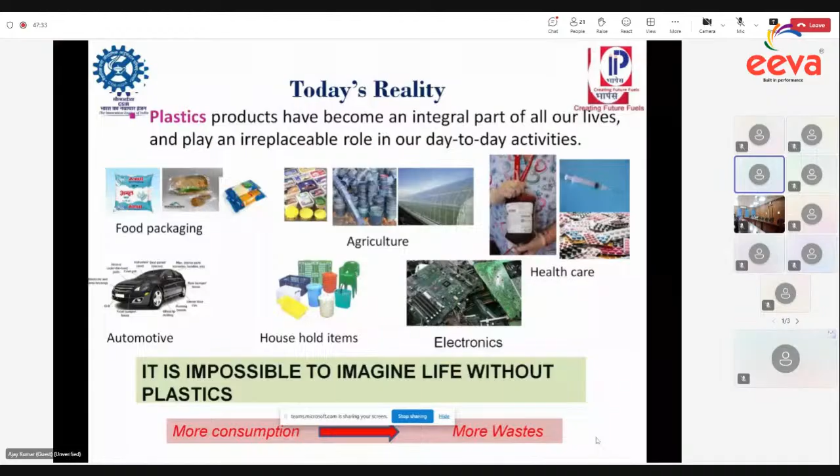So if we have more generation, and as you know plastic is non-biodegradable, we have to find a solution for how to dispose it, because it creates problems for our society, health, human beings, animals, everything for the environment. So we have conventional waste management like landfilling, incineration, mechanical recycling. As you very well know, I am not going to detail all these things.

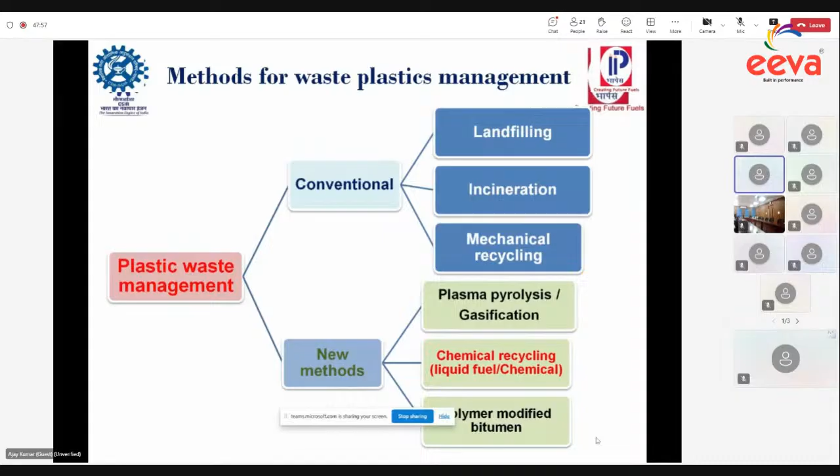Here, what IIP offers is chemical recycling. So what is chemical recycling? As you know, the origin of plastic production is crude oil. So we want to recycle from plastic back to crude oil. It is the permanent solution. If you see conventional methods like incineration and mechanical recycling, these will not give a permanent solution.

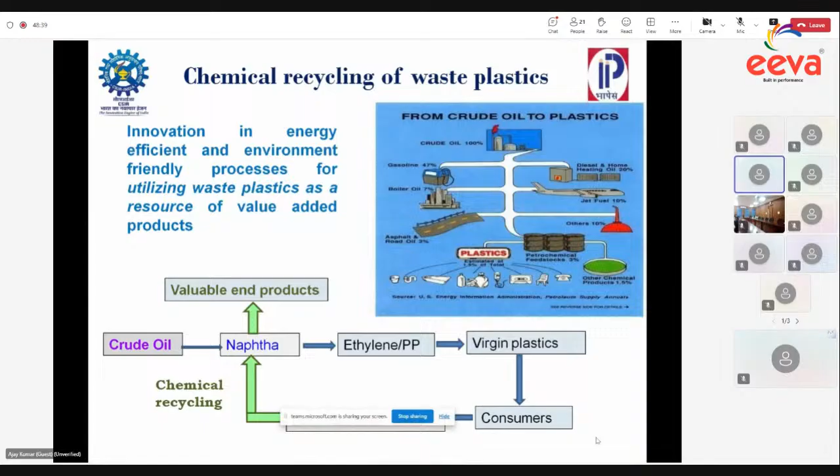So here our emphasis is to convert the plastic into crude, like pyro oil, and then convert it into useful products like petrol or diesel. So what types of products does IIP offer from chemical recycling of waste plastic? Petrol, diesel, greases, wax, and chemicals.

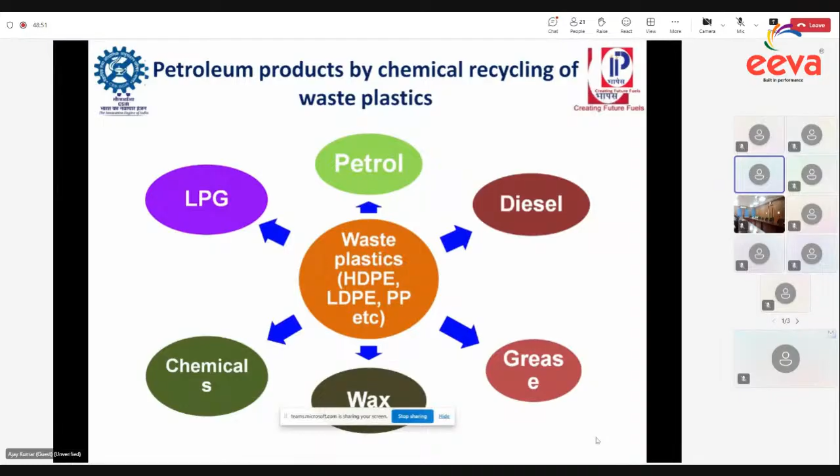So what is the CSIR-IIP-GAIL technology? What types of feed are required for this process? All polyethylene and polypropylene, PE and PP, are useful for this process. We are avoiding PET bottles and PVC, because polyethylene and polypropylene make up almost 60 to 70% of the total MSW plastic. So here we are targeting only polyethylene and polypropylene.

As you know, this MSW plastic contains foreign materials like organic contaminants. So we have to pre-treat this plastic so it can be useful for our process. There are a number of steps for pre-treatment.

Firstly, we do dust blowing, then shredding of the plastic into smaller pieces, then water washing, then drying, and then agglomeration. These are the steps for pre-treatment of our waste plastic, and this feed is useful for our process.

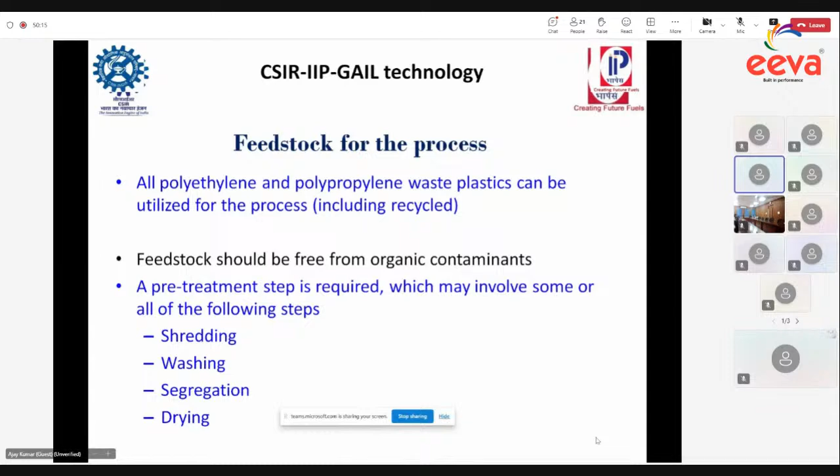So what is the CSIR-IIP-GAIL technology? In this technology, if you take 1 kg of plastic, you will get either gasoline or diesel or aromatics along with LPG.

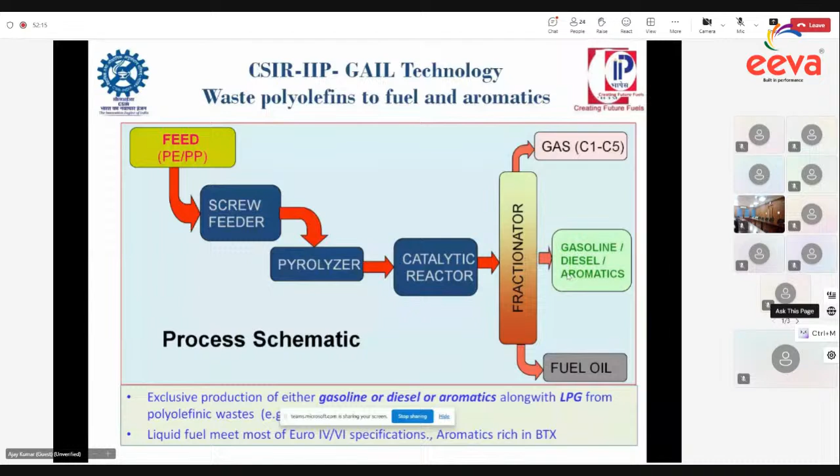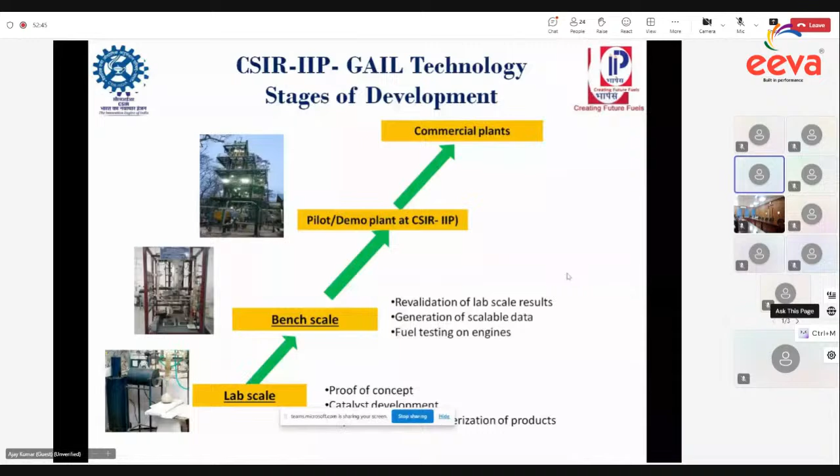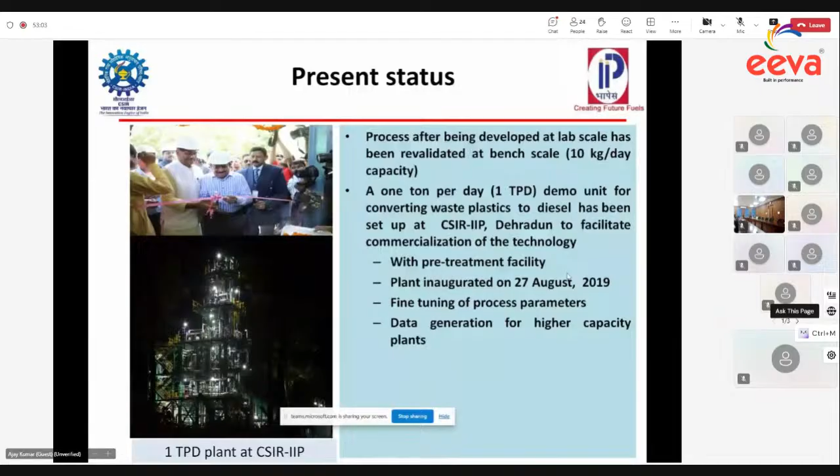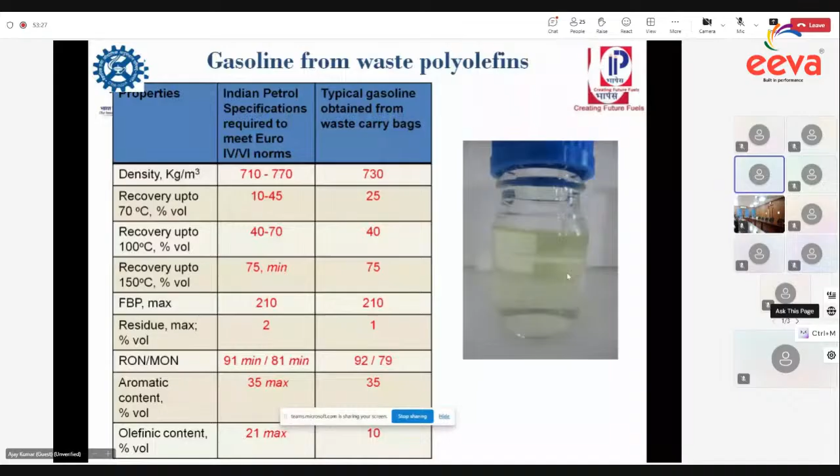So these are some properties. As you know, for diesel or petrol, we have to meet the BS4 or BS6 standard norms in terms of density, viscosity, final boiling point, aromatic content, all these things. In our process, these properties are meeting the standard for diesel from waste plastics.

We also did some emission performance testing of these waste plastic fuels. We have the laboratory in IIP, so we checked emissions like particulates, carbon dioxide, all these things. It is matching with the conventional diesel obtained from the petrol pump.

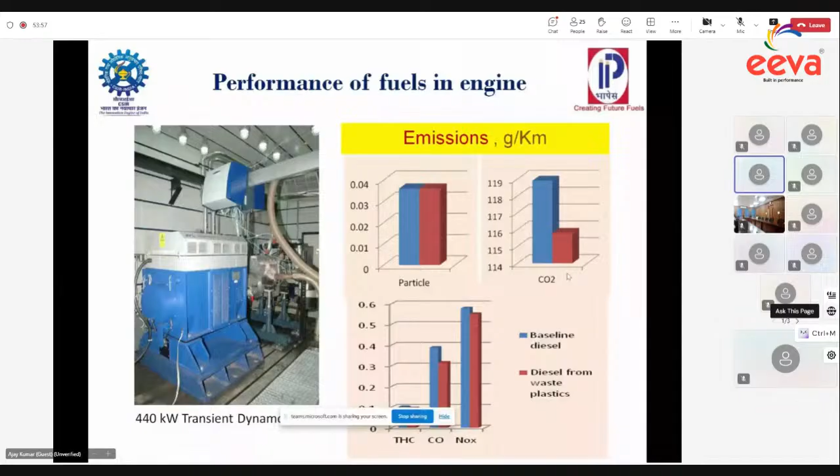This is just the efficiency of the fuel in terms of kilometers per liter. It is at par with the conventional diesel obtained from the petrol pump.

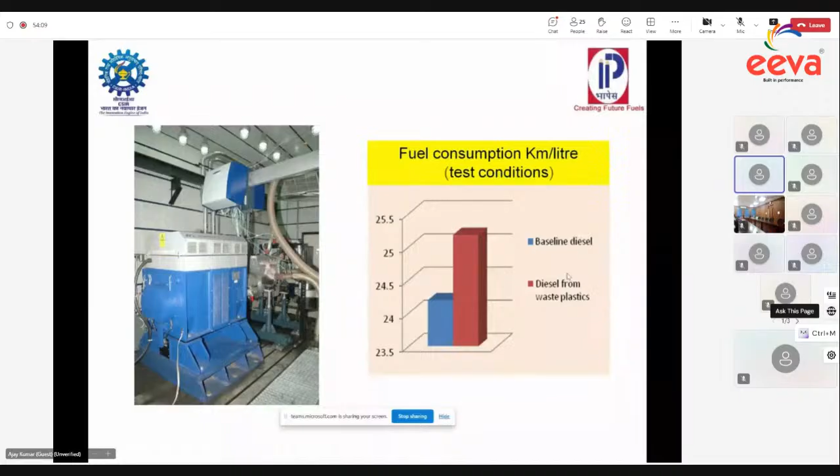Also, we have developed the technology from the waste plastic to wax and greases. In terms of economics, we cannot increase the price of diesel or petrol due to social cause reasons. So we have also developed a process to produce petroleum waxes or greases which are costlier than diesel or petrol, so the economics are better compared to petrol or diesel. We have also developed this technology.

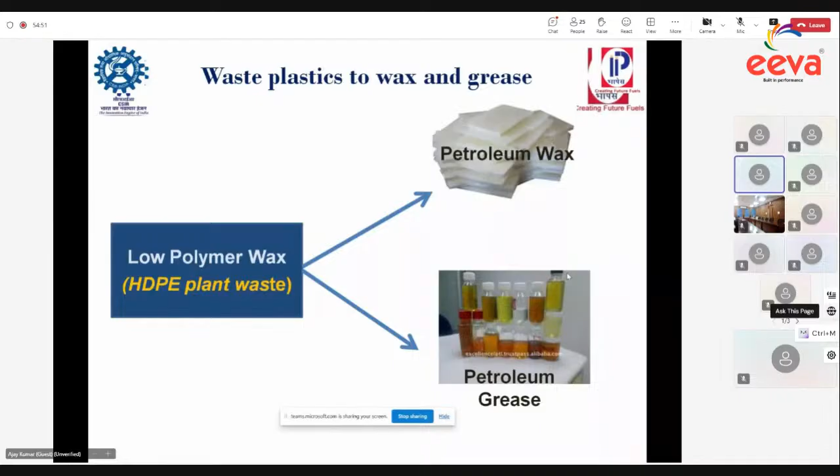In terms of utility requirement, manpower requirement, and land requirement, we need a pretreatment unit as well as a process unit. Land for the pretreatment unit requirement is 2 acres. For a conversion unit, diesel conversion is 1 acre. We also need electrical power, water, and LPG for the starting fuels.

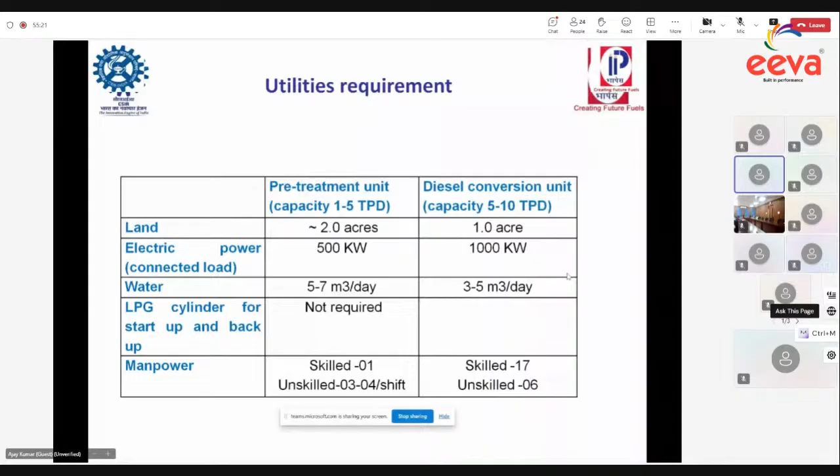So to conclude, this is the process to produce diesel and petrol and solve the waste plastic disposal problem in an environment friendly manner.

CSIR-IIP also developed a process for waxes and greases from waste plastic. These plants can follow a hub and spoke model, meaning the pretreatment unit is at the site where plastics are concentrated, such as the municipality, and the process unit is located away from that. This process is economical even if we set up the plant for lower capacity, like 1 TPD or 2 TPD.

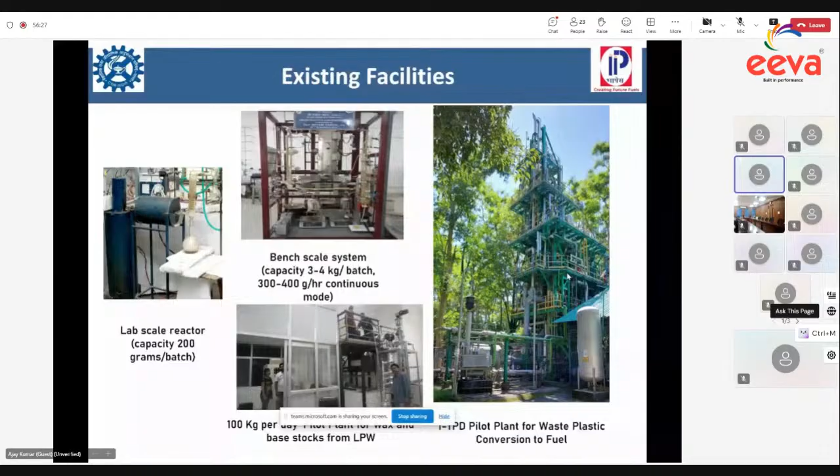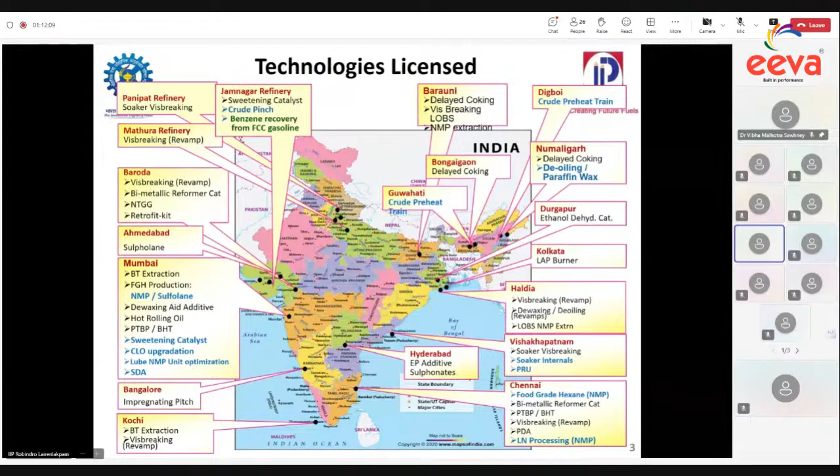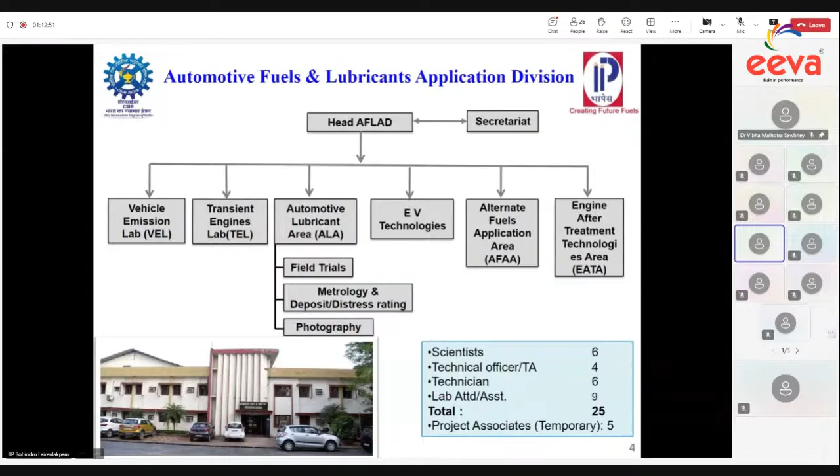So moving on, we have different divisions, and the division I belong to is called Automotive Fuels and Lubricant Application Division, and we deal with the applied area where different fuels are tested for their performance and compatibility with materials and so on. You might have heard of E20, E10, plus the upcoming flex fuel. So there your petroleum product is not 100%, it has been mixed with alternative fuel so that we reduce the petroleum product.

And the introduction about our technology: there are thousands of diesel autos of L5 category already on road, and they are polluting with noise as well as air pollution in the cities, capital cities, tier 2 and tier 3 cities, leading to associated health issues because diesel autos emit high amounts of PM10 and PM2.5. Those emissions are very much harmful to human health.

So we have devised one device which is still under evaluation stage, and with such indigenous device we can convert existing diesel autos into electric autos, which will mitigate the unhealthy level of air and noise pollution in state capitals as well as tier 2 and tier 3 cities. Apart from that, this product will be an import substitution, and it aligns with India's energy independence goal of Viksit Bharat as well as Atmanirbhar. It will contribute to our target of 30% electric vehicles on road by 2030. At the same time, this kit can be used for any new electric autos designed and developed by different entities. So this kit will be common for two purposes: one for new three-wheelers, and one for the electrification of existing diesel autos into electric vehicles.

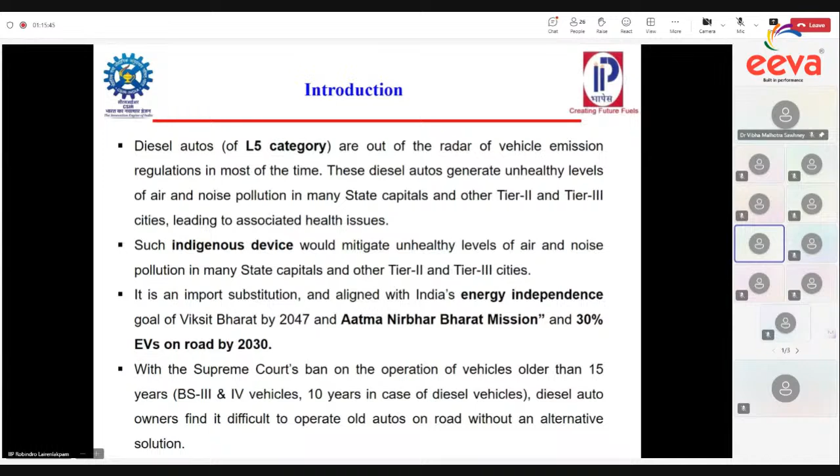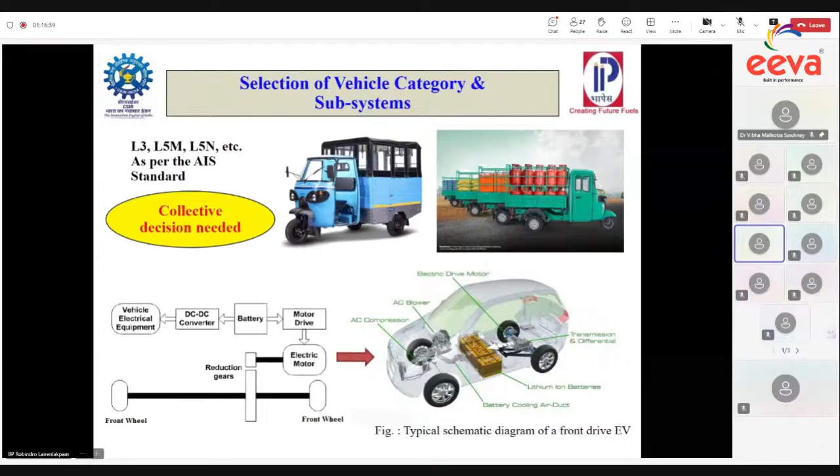Moving on, we need a thorough study for the EV motor selection, depending on the vehicle category, whether it is cargo or passenger, because the weight and other vehicle dynamics will be different. So the selection of EV motor is very important from the perspective of sustainability and efficiency.

From the sustainability perspective, permanent magnet motors are not sustainable because of the use of rare earth material, which is not much available in India. So at the end of the day, we may be importing the rare earth material, the magnets, from other countries, and then we'll end up with another problem. That's why in our study, we are using non-rare earth electric motors, so that it creates a sustainable ecosystem for electric mobility.

While selecting and designing the electric motor, we need to consider certain factors like frequent start-stop, high rate of acceleration and deceleration depending on different drivers' behavior, then high torque at low speed, for example hill climbing or flyover climbing, which we call road gradient in technical terms, and also low torque cruising.

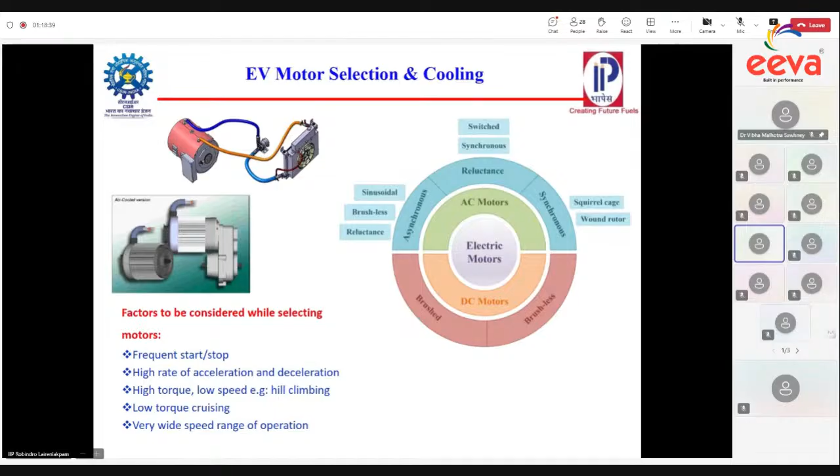Moving on, the selection and sizing of battery is very important, depending on how much electric mileage we are targeting to achieve, for example 100 kilometers, 150, or 80 kilometers, and so on. We are using lithium-ion battery because of its high energy density, smaller size, and many other advantages.

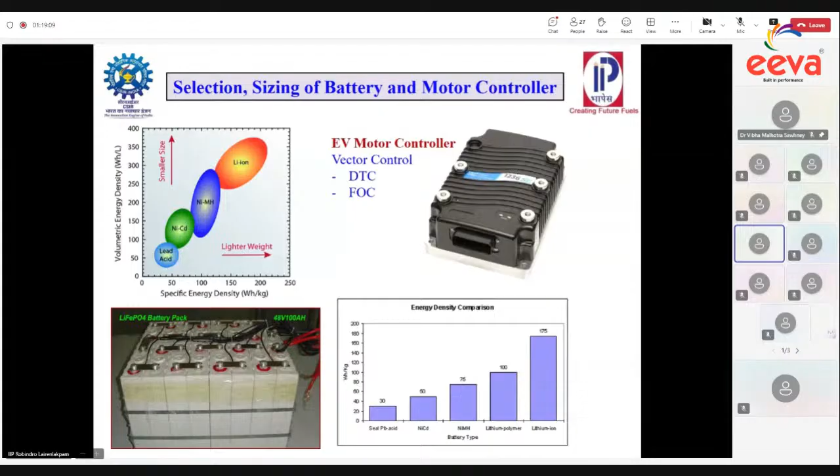Moving on, while doing such engineering work, we need to also consider the different drivetrain topology, how the motor, gearbox, and differential can be arranged and connected. There are different ways of connecting and arranging these products and subsystems inside the vehicle. So these are the different topologies that I will be discussing briefly.

The first topology, EM stands for electric motor. The electric motor is directly connected to the clutch, gearbox, then differential. This is a typical drivetrain topology of an IC engine vehicle, where the IC engine is removed and the electric motor is fitted in its place. It's a very simple one.

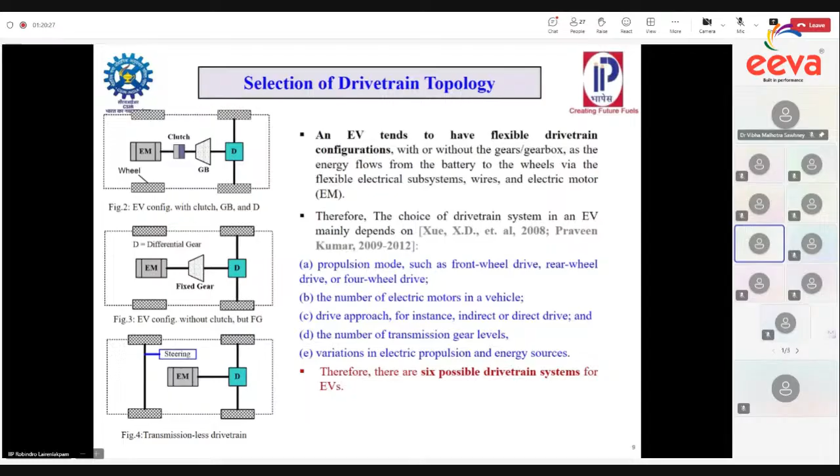The second one has the electric motor directly connected to a fixed gear. This is what we have done in one of our proof of concept studies. The third one has the electric motor directly connected to the differential. This topology is adopted by electric rickshaws, e-rickshaws; if you look at an electric rickshaw, you will find the electric motor connected directly to the differential.

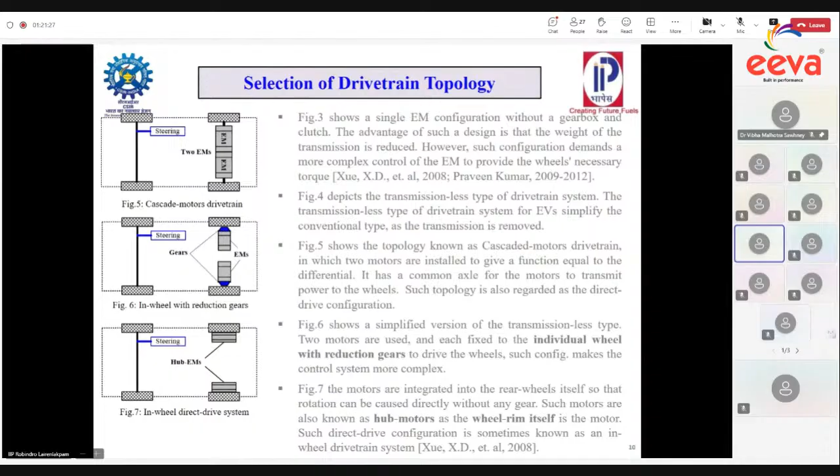The wheel rim itself is the motor, like you have in electric two-wheelers and scooters. So these are the different topologies based on our requirement and the techno-economical analysis. We need to select the appropriate topology for our new kit as well as for our new electric vehicle.

Once you get the torque at the differential, it is divided into two equal torques on each wheel. Then, once you have the torque on the right and left wheel, it will be used for calculation of the force on the wheel. This force is what you require to select and size your electric motor, because this force is used for the propulsion of the vehicle, to move it forward and to carry the load. That is how we calculate the forward force for the vehicle and the force acting on its wheel.

Moving on, this is research we did a couple of years ago just to check the feasibility of converting an existing IC engine vehicle to an electric vehicle. This was done as per the gazetted notification G.S.R. 167(E), and this legislation allows conversion of any existing IC engine vehicle into an electric vehicle, subject to the approval and certification of the kit.

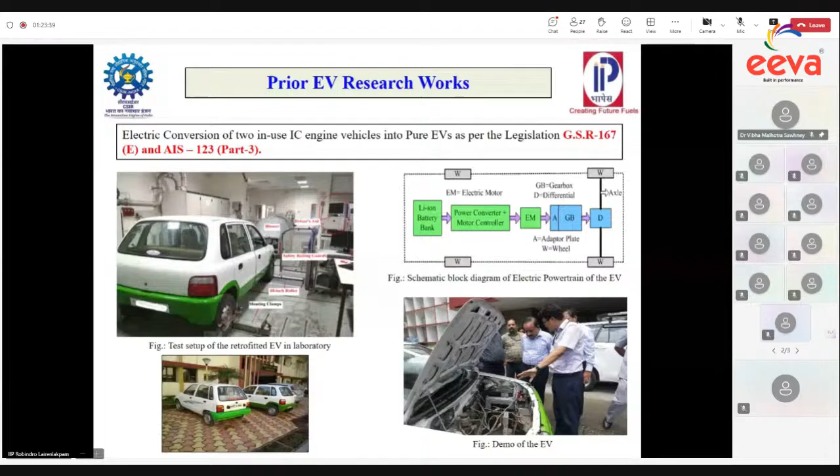This conversion process is done as per the automotive industry standard 123 part 3. This is what we have done in our lab, and we found that this is very much doable, with a lot of advantages from the techno-economical perspective.

As part of that prior research work, we performed these experiments in the laboratory and on road. Once converted, the vehicle is subjected to road load simulation on a chassis dynamometer and driven with Indian driving cycles common across the automotive industry, like IDC and MIDC, the modified Indian driving cycle. We also used different equipment to check vehicle dynamics, safety, and stability.

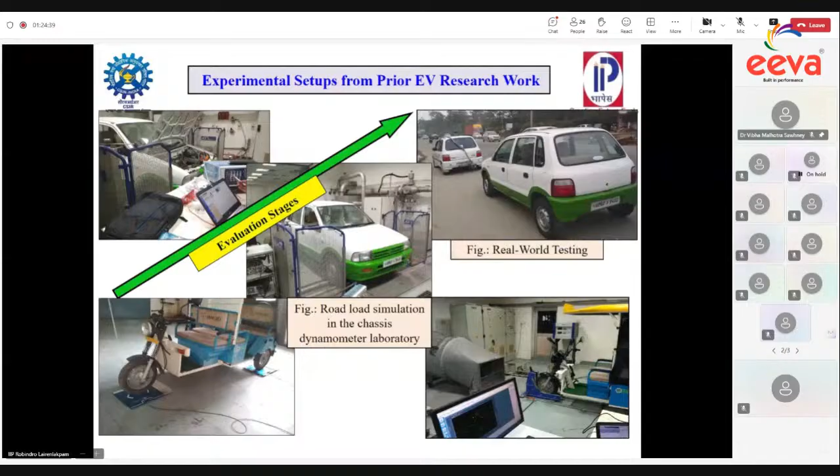For example, once you remove the IC engine and related parts, the original vehicle dynamics is disturbed. We need to bring the center of gravity back to the original position, measure the new center of gravity, and determine new parameters for the retrofitted as well as the new vehicle, like tractive force, vehicle reference weight, new center of gravity, and so on.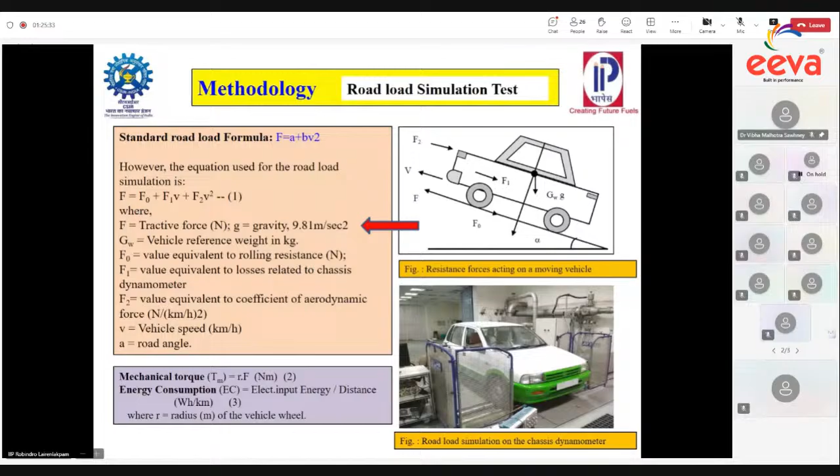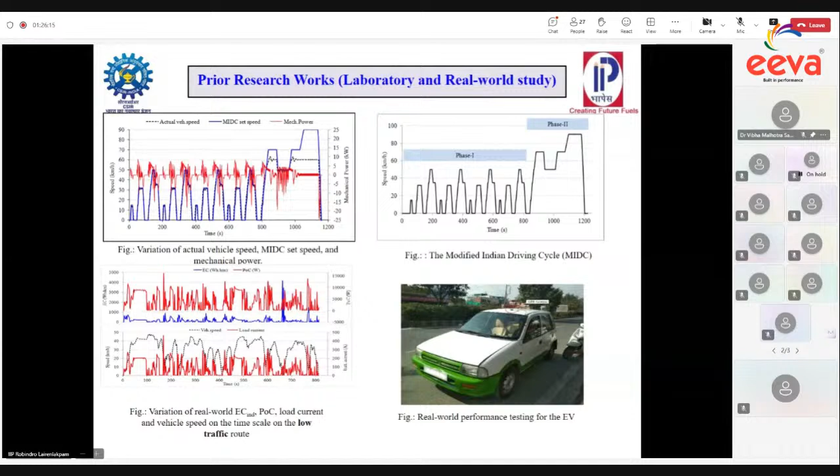Moving on, we used the modified Indian driving cycle during the laboratory test. During the entire cycle, we collected and recorded electrical parameters like current and voltage of the electric vehicle. Then we analyzed areas of improvement, energy consumption, maximum current flow, and so on. Likewise, the same vehicle is put through a real world test on actual road. We see the energy consumption and other electrical parameters, compare the laboratory data with real world data, find the gap, and improvements can be made.

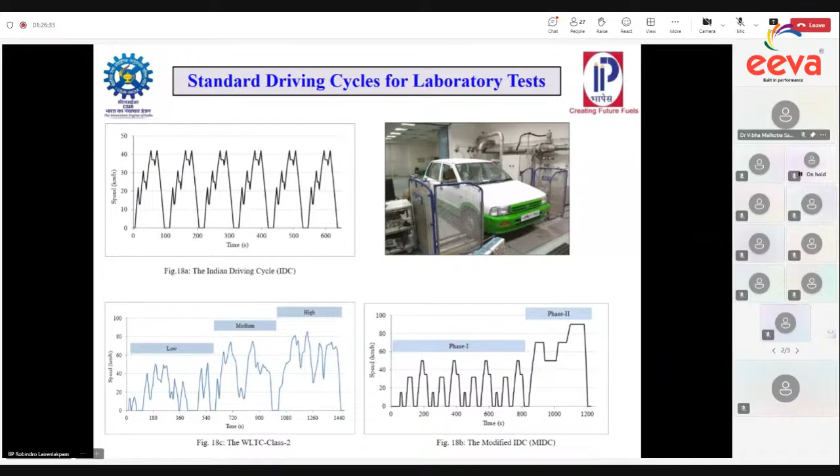These are the standard driving cycles that we use in our laboratory, used across all the automotive industries in the country. WLTC is the new cycle, used worldwide, and India is now going to adopt this new driving cycle. This is a very important part - once we have the new vehicle or retrofitted vehicle, it has to go through regulatory compliance tests and all the methods defined under the automotive industry standard. It has to go through that, and it has to pass.

Only the testing agencies will give the certification for launching and commercialization purposes. This is done under the CMVR homologation requirement, the Central Motor Vehicle Rules homologation. There are many legislations and procedures that need to be followed for new vehicles as well as retrofitted ones. For retrofitted vehicles, we need to go through AIS 123 Part 3.

It defines what to do and the procedures to be followed. Our target is to have a landing price of around 1.5 lakhs per kit. This target is driven by the battery, since battery is not mass produced in India right now. Mostly it is imported, though certain companies are manufacturing in India with Indian technologies. Once the battery cost is reduced significantly, the cost of the kit will also get reduced.

At the same time, during retrofitting, the technicians and fitters need to be trained on how to fit, repair, and maintain these systems. Such training can be conducted at regional MSME centers through MOUs and tie-ups, utilizing their existing infrastructure for subsystem fabrication and other work. We can collaborate with MSME for human resource training and imparting subsystem-level training for handling, repairing, fitting, and related tasks.

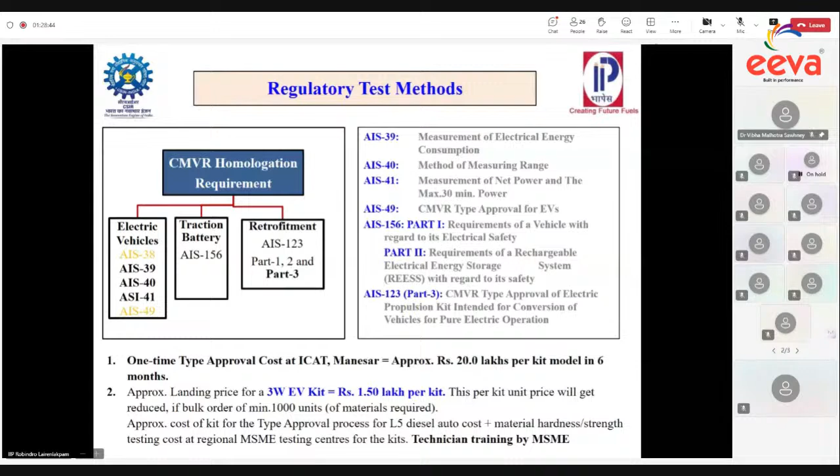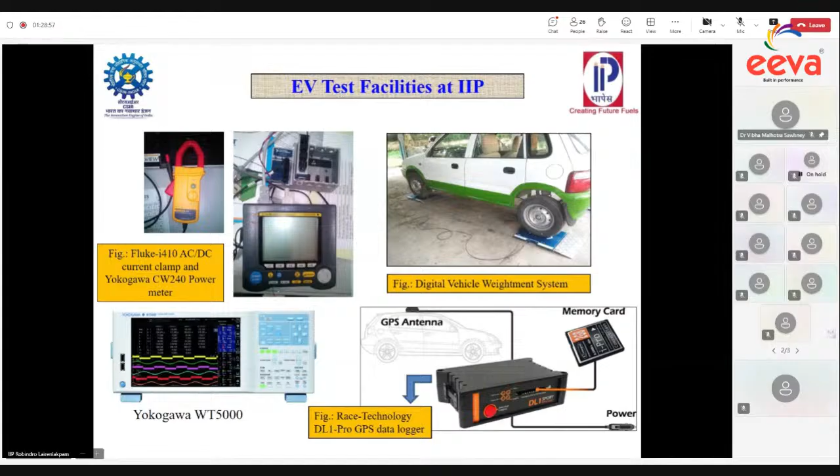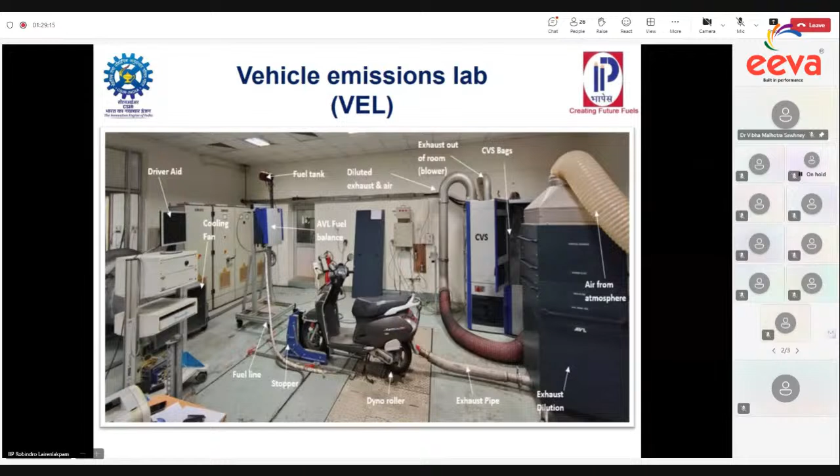We have many test facilities for new vehicles as well as retrofitted ones. These test equipments are required to generate scientific data for analysis and improvement. This is our vehicle testing laboratory, where the vehicle is mounted on a computer-controlled roller called the chassis dynamometer. The vehicle is tested in the laboratory, where road conditions are simulated inside.

Our division also conducts training courses every year. Even now, some transport officials are on our campus. We are imparting training to them, sharing the latest policies and updates from the ministry, as well as the latest technology. This is one area where we can collaborate with MSME centers for training technicians and fitters.

With this, I conclude my presentation. Thank you very much for your kind attention and patience. If anybody has any question, the forum is open to you. Over to you, madam.

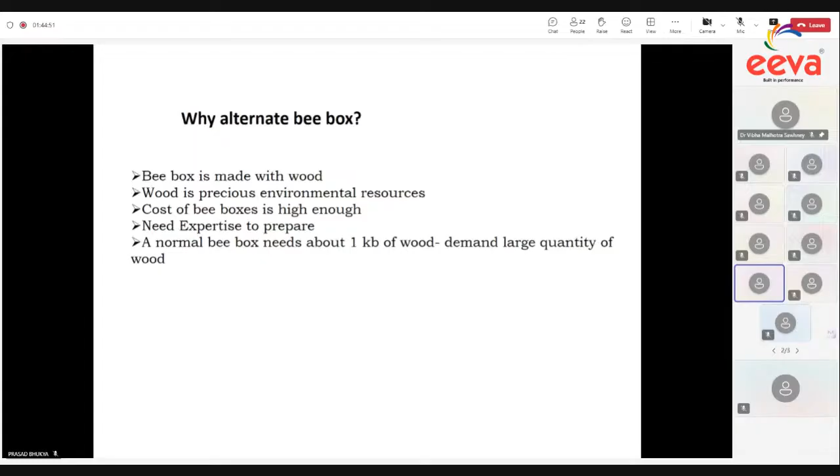If we see, then in that case we have to sacrifice a lot of trees for making honeybee boxes, because a normal bee box for Apis mellifera needs around 1 kg of wood, which demands a large quantity of wood, and is also very costly, because a wooden bee box in Assam costs around 2,200 to 2,300 rupees per box. It also needs some special expertise to prepare, because the general public cannot prepare it themselves. Although in India we know different measurements of honeybee boxes like A type, B type, it still needs skill to prepare these boxes. That's why we thought of some innovation regarding low cost honeybee boxes.

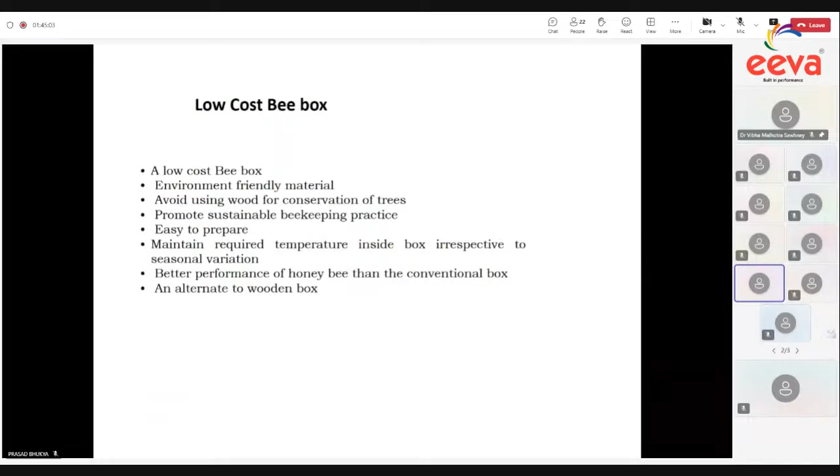So this is a low cost bee box, and we completely removed the use of wood.

Previous slide. Previous. Then again, previous one.

So we completely removed the use of wood in these bee boxes. Whatever material we use is environment friendly, and it is basically bamboo based. The base is bamboo, and it ultimately helps sustainable beekeeping practices.

The bee boxes are easy to prepare because whatever measurement we have taken is as per Indian standard. We have not changed any measurement for Apis cerana or Apis mellifera; we just substitute the material, so instead of wood we use other material.

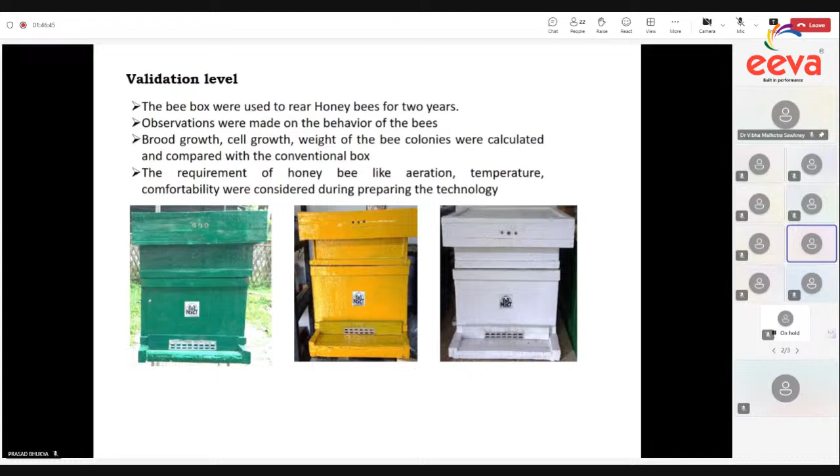As per our past experience and research, these new honeybee boxes also completely maintain the temperature inside, because temperature and humidity is very crucial inside the bee boxes for honeybee, since honeybee is a poikilothermic animal, so temperature is very essential. Irrespective of seasonal variation, it maintains the temperature around 32 to 33 degrees Celsius, and it gives somewhat better performance than the conventional bee boxes.

Next. So these you could see, some of the bee boxes. The box we use to rear the honeybee, Apis cerana, because Apis cerana is very much prevalent in Northeast, and we observe the behavior of the honeybee, because this is very important.

You may have heard that around 30 to 40% of honeybee colonies now disappear from the beehive. So we completely observed the behavior, and the behavior is very clear, very good, because we got a very good brood growth, brood health, cell growth, and weight of the bee colonies, which is very good.

And we compared it to the conventional bee boxes, and it provides complete aeration, temperature, and comfortability, which is very much a requirement for the honeybee.

So these are our new bee boxes we prepared, and as you can see, these we have already commercially transferred to 4 parties, basically NGOs and self-help groups. Some photographs I have shown here; these they prepare themselves and distribute to farmers for rearing honeybee.

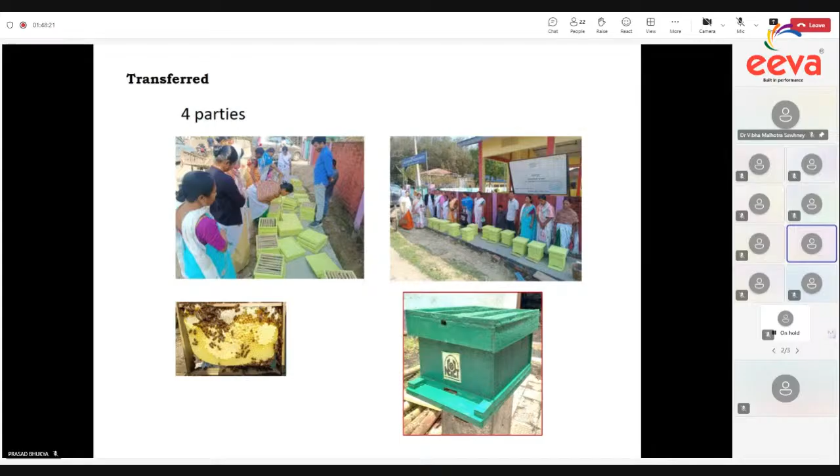One advantage is that it is very much easy to prepare. You do not need any industrial scale concentrated unit of production, because if we teach the farmers, they can prepare it themselves for their own use. Next.

So these are some of the photographs I have shown you. These are already transferred to different NGOs, and this is another of these bee boxes we are seeing. The colony, you could see here, how facilitating the colony growth is there. Next.

So these honeybee boxes were actually inaugurated by our former Director General Sir in October 2021, and he formally inaugurated these honeybee boxes. You could see here, in our farm we maintain several such bee boxes along with honeybee colonies.

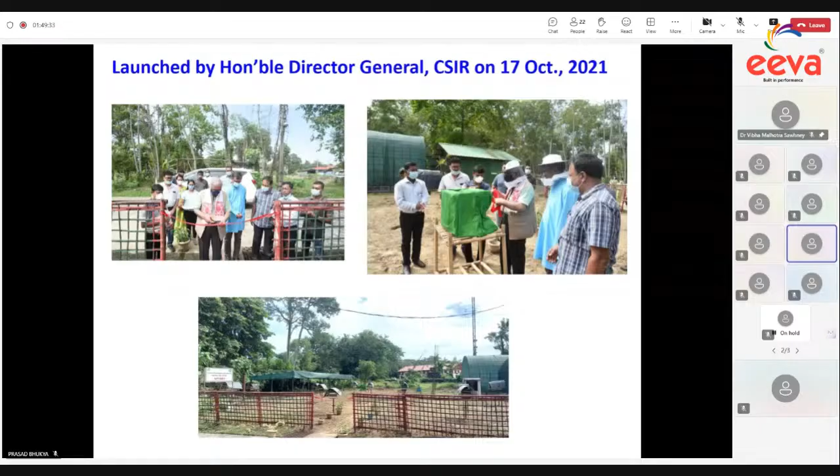Next. So this is, in brief, the brief one I like to inform about regarding the new honeybee boxes. We are now preparing these Apis mellifera bee boxes, which we would like to send to Lucknow, to CSIR-NBRI, for some CSIR floriculture mission project, and it is prepared by one entrepreneur in our facility under our supervision.

And two other parties, one from Chennai and one from Assam, have already applied for getting this new technology for themselves. So briefly, this is it, but I am open for any questions if you have.

Good afternoon. I am going to speak about Expert Eye-on-Pellet technology. This is the automatic process control system for the pelletization disc in the steel industry. Myself, Dr. Santosh Kumar Behera, and with me Dr. Debi Prasad Das, my head, is available here.

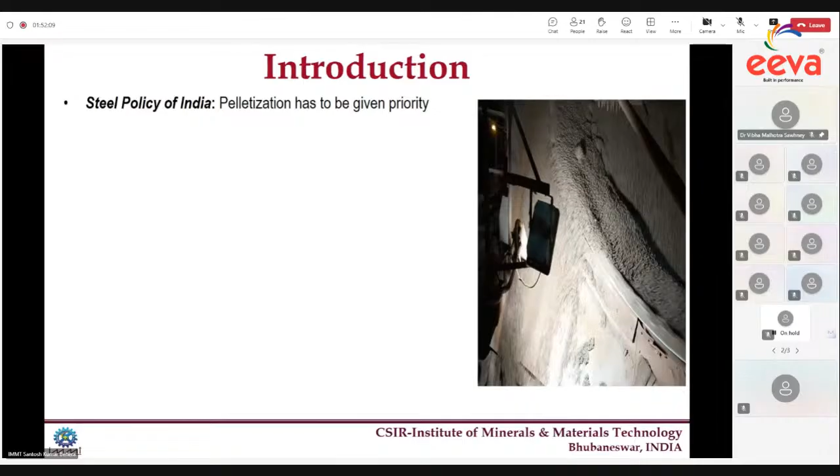Before going to technology, I'll tell about what is pelletization and its importance. As per steel policy of India, pelletization has to be given priority. Pelletization is a process of making balls, called pellets, from iron ore fines for the blast furnace.

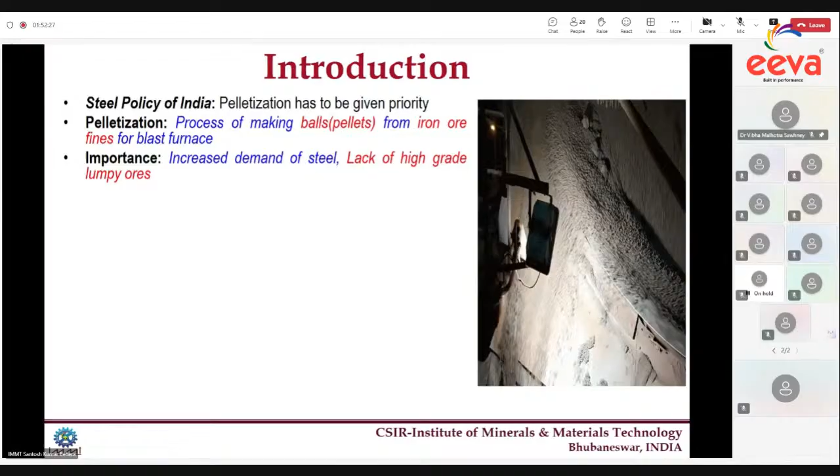There is increased demand of steel, but lack of high-grade lumpy ores. We are getting fines and low-grade iron ores. The pellets formed by a rotating disc shift to desired size, which is 8 to 16 mm. Less than 8 or more than 16 is undesired, and you have to recycle it once again. We call less than 8 undersize, and greater than 16 mm oversize.

Our objective is to increase the desired size range, 8 to 16 mm, to maybe 90%, and reduce the recycle load. It is a very complex process, and the size depends on ore type, moisture content, binder type, RPM of disc rotation, TPH that is feed rate, and angle of inclination of disc.

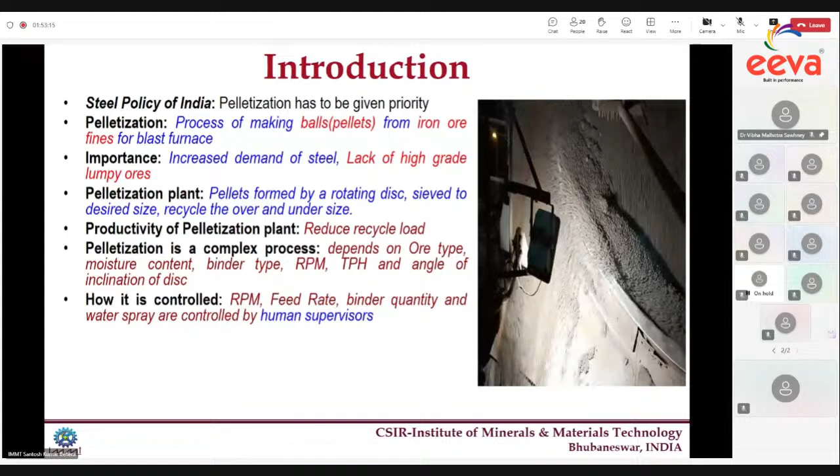So how is it controlled now? One human supervisor stands, and there are 6 discs in one plant, and he's watching the pellet size, observing with his naked eye whether the size is as desired, or increasing or decreasing. Then he tells the control room person to change the RPM and TPH. This leads to a lot of human error and difficulty in decision making on multiple discs.

This is the pellet plant process. One disc is there, and iron fines are fed by conveyor belt on top of the disc. There is a binder and water spray through a water nozzle, and due to rotation, the pellets are formed and fall onto the conveyor belt. At the discharge end, we are capturing the image.

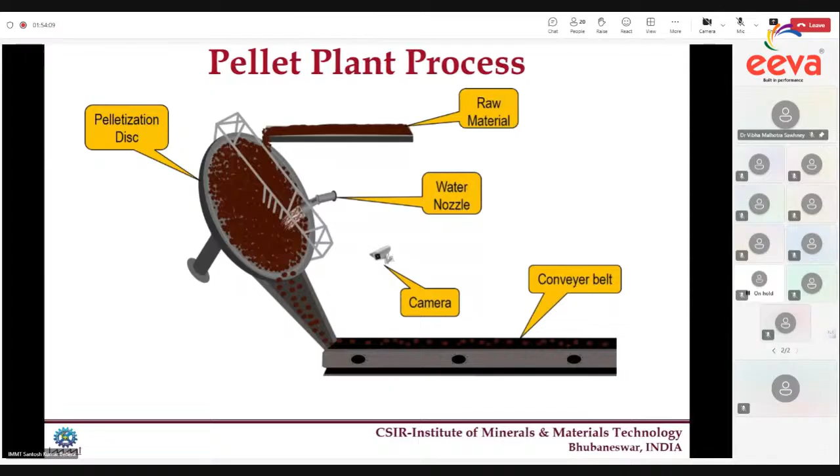The application is monitoring and control of pellet disc used in steel production. We named the technology Expert Eye-on-Pellet. We already filed a patent and it is already granted. Iron ore pellet manufacturing industry, generally steel industry, will use this technology.

As already told, pellets and discs are controlled by a human operator, who watches the disc to visually estimate the size of green pellets and control the disc parameters manually. They work in 3 shifts in a very dusty and noisy area. Pellets of desired size, 8 to 16 mm, are not always possible to produce through manual control.

Our approach is a camera-based vision system for real-time size analysis, and a rule-based Expert Control System to control the disc parameters, that is RPM and TPH, and we control this through the DCS system of the plant.

This is a semi-automatic control system which will control RPM and material feed rate. The benefit of this technology to industry is auto control helps in eliminating human errors, increases production, and also avoids exposing human operators to the dusty and noisy environment at the plant site.

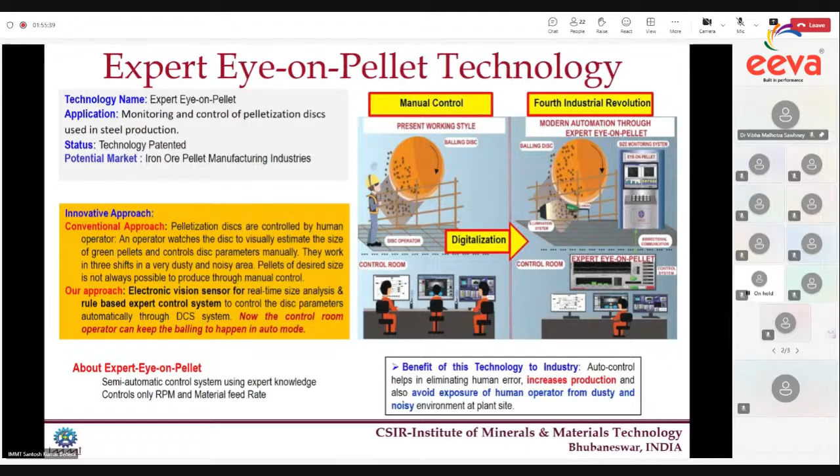We have already filed 2 patents, one for the monitoring system, another for the control system. You can see this pelletized disc rotating at a certain speed, and we have installed a camera at the discharge end with an illumination system. We continuously capture the images and do image processing, and determine the size distribution - less than 8, 8 to 10, 10 to 12, 12 to 14, 14 to 16, greater than 16 - in terms of weight percentage.

This camera is connected to the local monitoring system called Eye-on-Pellet. This is connected to the control room through OPC communication via fiber optics, and there is a controller available in the control room connected to the plant DCS system. On the right side is the GUI of our control system.

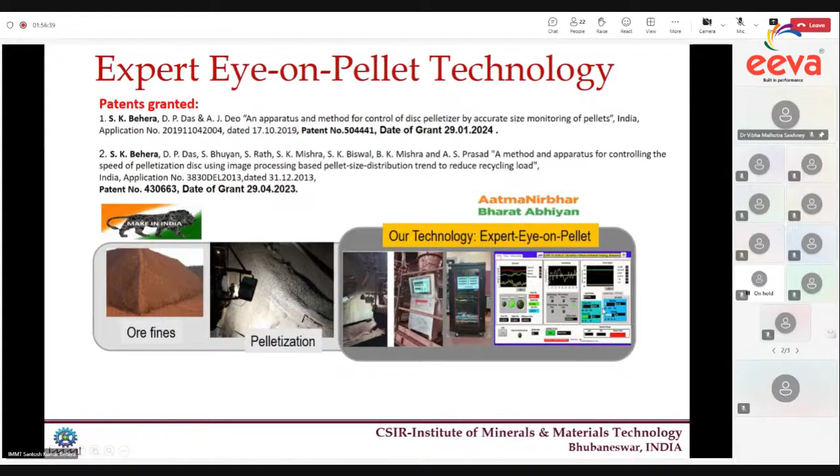This is the architecture of our control system. Here you can see a camera capturing the continuous image, connected to the monitoring system, that is the Eye-on-Pellet system. One PC or embedded hardware will be there, which will tell the size distribution in different size ranges. This monitoring system is connected to the Expert Eye-on-Pellet system through OPC communication.

This Expert Eye-on-Pellet control system takes size information from Eye-on-Pellet, as well as RPM and TPH values of the disc from the plant DCS system. On the right side is the plant DCS system, which is giving the sensor value of RPM and TPH to Expert Eye-on-Pellet, and Expert Eye-on-Pellet is giving commands to the DCS system to change RPM or TPH as per requirement.

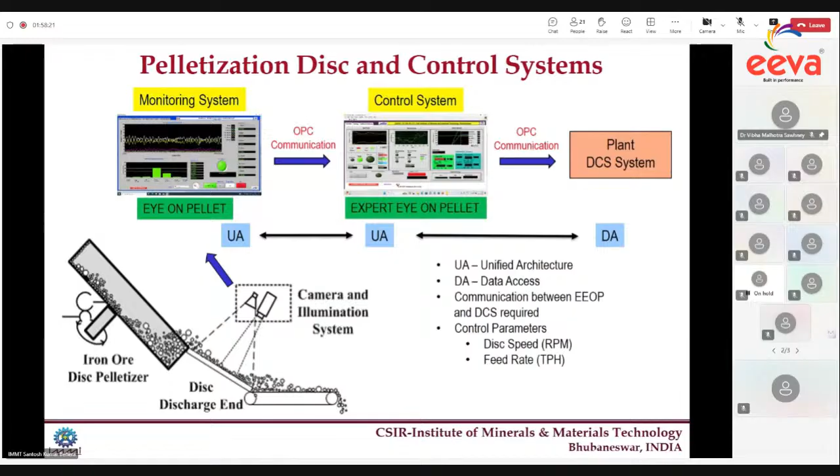A simple PID control cannot work here, that's why we developed the Expert Eye-on-Pellet system. Only one bottleneck is there - the plant DCS system is very old technology, and we have to interface our Expert Eye-on-Pellet system to the plant DCS. We are using OPC UA communication, while the plant has OPC DA communication. We have to synchronize these two properly, and we are doing that.

This is already installed at the JSW Steel Vijayanagar works. They are using this technology, and plants are running in auto mode. You can see here there's a disc, a camera, and a local monitoring system, the Eye-on-Pellet system.

This is a server, and here is the GUI of the Eye-on-Pellet system, and this is the GUI of our control system, the Expert Eye-on-Pellet system.

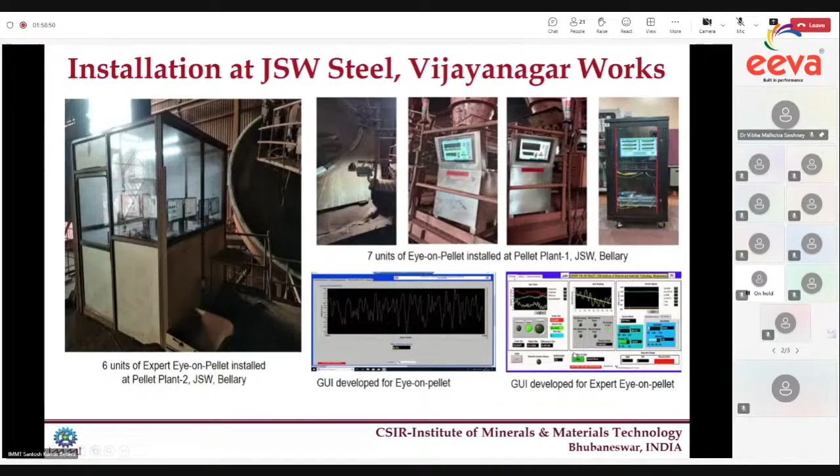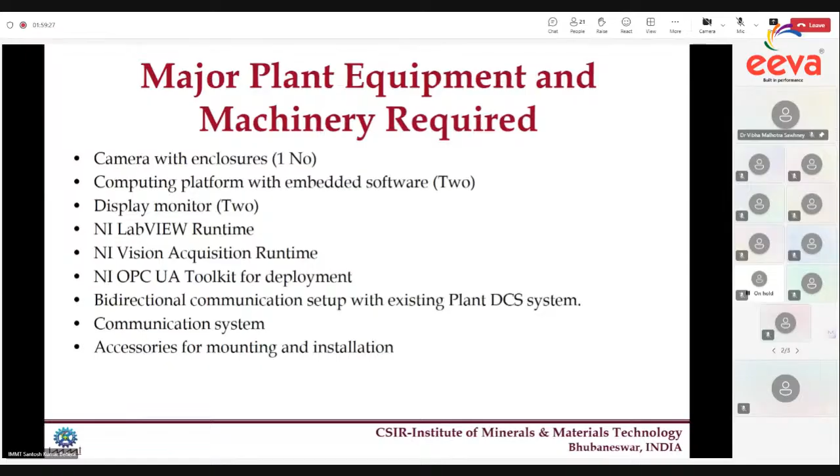The major plant equipment and machinery required for this system is one camera with enclosure, and a computing platform, that is a PC with embedded software. We use two, one near the disk and another in the control room, and two display systems, NI LabVIEW runtime software, NI Vision Acquisition runtime, NI OPC UA toolkit for deployment, bidirectional communication setup with the existing plant DCS system, and accessories for mounting and installation.

Advantages include a multi-input and multi-output controller for controlling the parameters of the iron ore disc pelletizer, an expert knowledge-driven rule-based controller for controlling the rotational speed and feed rate of the pelletizer disc, bidirectional communication and integration with the existing DCS, and an option for switching from auto control mode to manual control mode in the DCS.

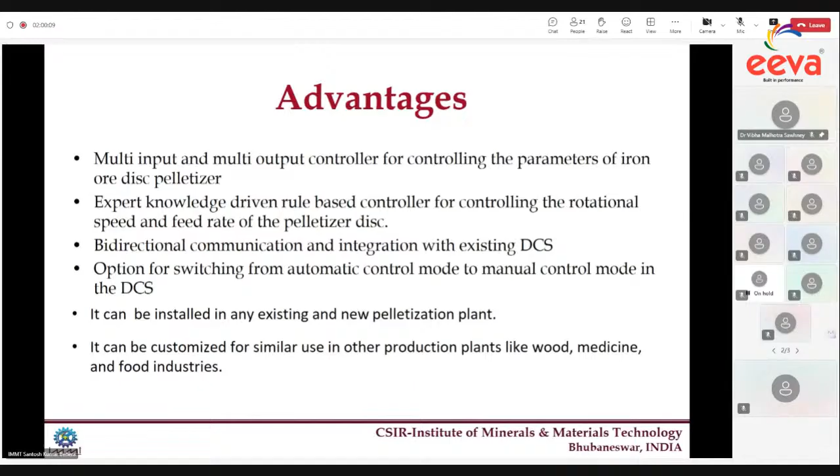We have two options. When there is a problem, we can switch over to manual control mode. It can be installed in any existing or new pelletization plant, and it can be customized for similar use in other production plants like wood, medicine, and food industries.

We already transferred the technology to SVNT Infotech Private Limited; that duration is already over, in February 2024. The technology has been commercialized at JSW Steel Pellet Plant 1 Bellary, JSW Steel Pellet Plant 2, and BMM Ispat Limited, Hospete.

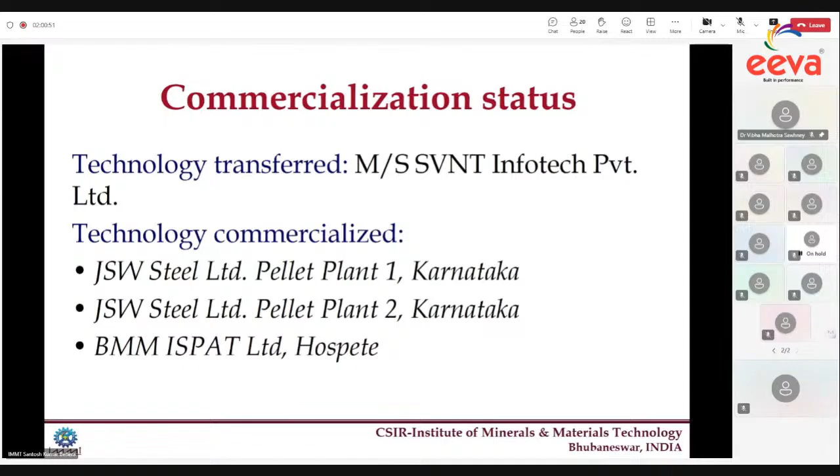We are competing with the Outotec Metso company. Worldwide, only one company has this type of product, that is Outotec Metso, a Finland-based company. Due to our technology, they reduced the price, but still we became L1. Around 4.5 crores we already got as orders for this technology.

There is a lot of demand for this technology. In India, only BMM Ispat and JSW Steel are currently using it, but there are many pelletization plants like Tata Steel, Essar, BRP, and others that can use this technology, even for foreign plants. Thank you.